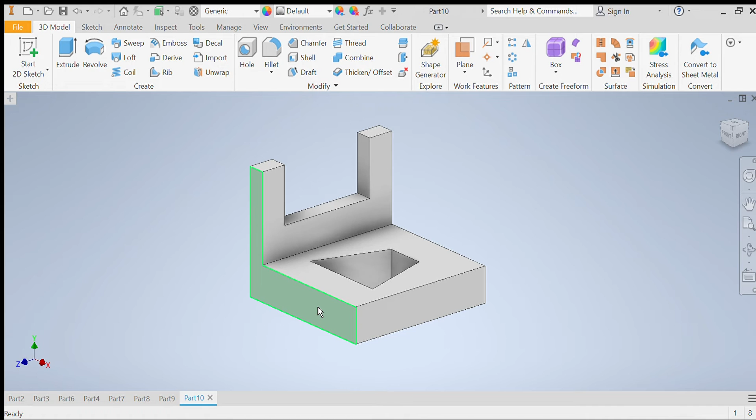So, File, New, Standard Millimeter. Again, if this is going too fast for you, go back to 4.1. I go a bit slower, or you can just ask me in lesson. See how we go. Alright, drawing the simple face, starting from top left corner.

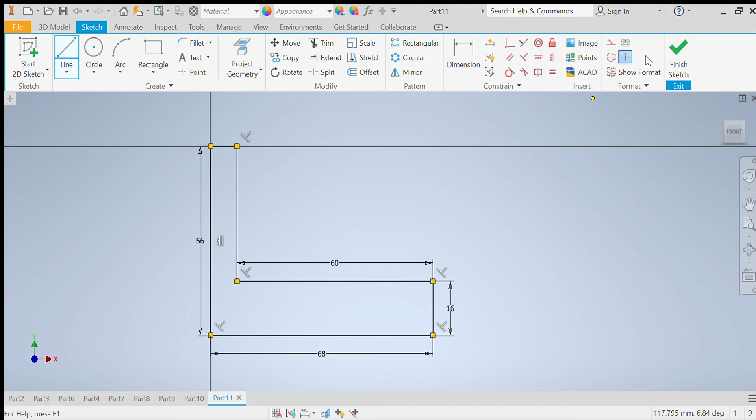And then I just finish off my shape. Click, click, done. Alright, going to extrude that. And I think it comes out 70. Yes. Enter. Beautiful. Alright, this one next.

Going to start a 2D sketch on this face. So, start 2D sketch, hover over here, click. Love Mr. Nelson's way of doing this. I'm just going to draw a rectangle, roughly. Doesn't matter where it finishes up here because we want it to cut all the way through and finish it around about here. To my dimension tool.

Love the dimension tool. We do not know how long this rectangle is across. Could probably figure it out quite easily actually, now that I'm looking at it, but for now, I'm happy with this. So, we want to...

Stop this rectangle from going down too far, so I'm going to get the dimension between here and here, which I know to be 26. My laptop is telling me that it's low on battery. 26. Enter. Next one.

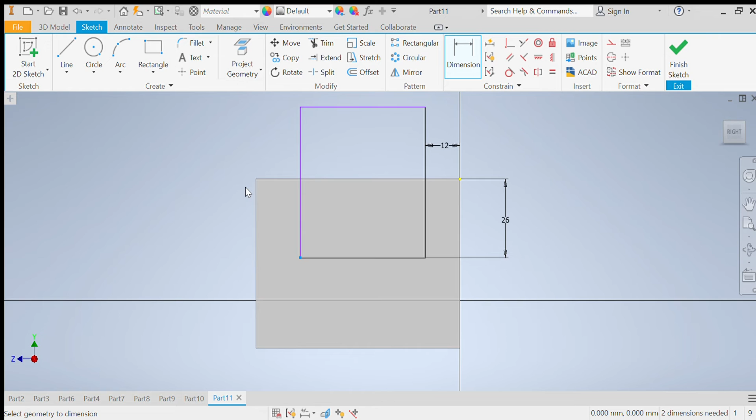Between the start of the rectangle and the end of my piece is 12, not 2, 12, and the same on this side. Now, actually, what I did find, because I'm having trouble with it now, when you're dimensioning, it doesn't actually seem to mind when you click between line and line, as long as you hold it or force the dimension in the right direction.

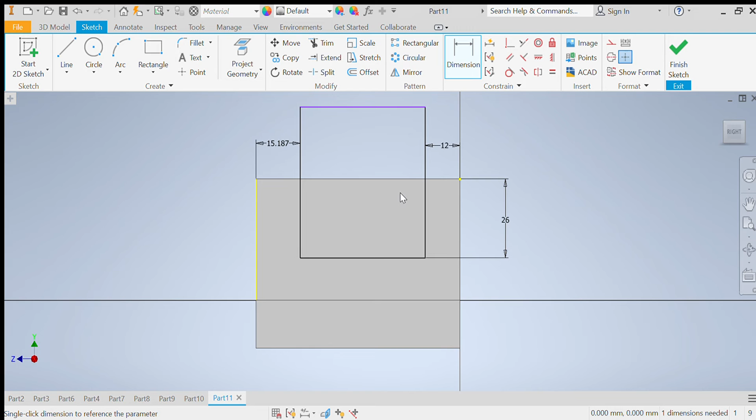So I want the distance between those 2 lines. So I brought it over here, or sometimes it changes the direction or the measurement that it shows you, sorry. Or it shows it over here and you don't know what it means. Whereas when it's here, I know exactly what it means. This one is also 12. That is all I need to do for this one.

Again, extrude, I'm going to hit cut. I know you can't see this menu, but when you do it, it is down the bottom in Boolean, and it's just the one with the red rectangle that says cut. And just hit enter. You don't need to change anything else. Just hit cut. Last one, the most complicated one.

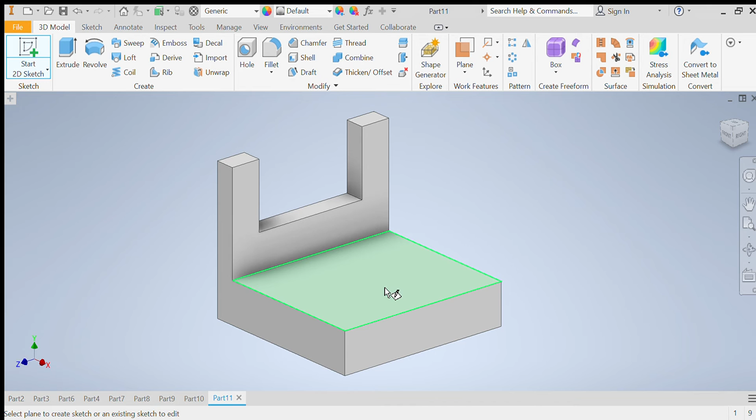Took me a little bit to wrap my head around. Start 2D sketch on this bottom face. I like to rotate it, so up here in this corner, I like to rotate it so that I'm working with a trapezoid on its bottom face, or bottom edge, sorry, side, it's a 2D shape. But if you are fine with working the other way, that's fine with me.

Alright, I'm going to draw a rectangle. Now, again, multiple ways to do this. If you don't like drawing the rectangle and then taking out parts, or just a random rectangle, you prefer more precision, go for gold. I find it takes longer.

Alright, critical measurements that we want to work out. We want to work out where this is sitting on the base here. To do that, we have to set some critical measurements first so that it stays where we want it. For that, we want to set the height.

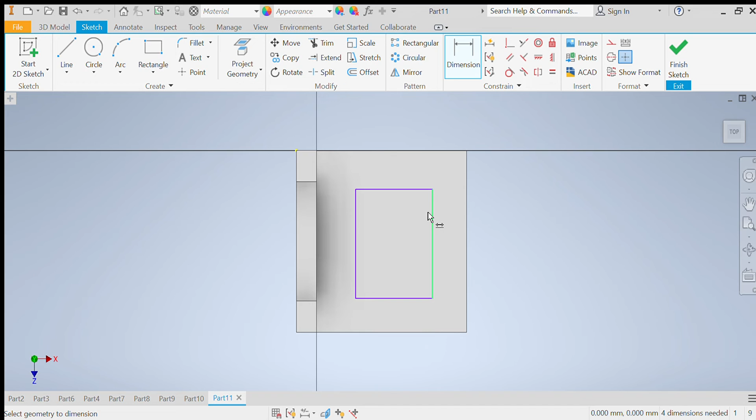Now, when I did it myself, I just clicked this. We don't want to do that because we're going to be deleting this line and it will change some measurements later. So we want to go from top to bottom out here, and it tells us that it is 34 tall. That's okay if it moves up here, no stress.

Next one, let's move it back. The measurement between this midpoint here, if I hover over the line, it should give me a green dot at the midpoint. We want between here and this line here. If I bring it up here, we want that to be 30. So the measurement between the midpoint of our dovetail template and the start of this right side here is 30, from the Inventor modeling exercise document. A bit of a weird one that it's measured to the middle, but it kind of has to because of just what's going on in the middle.

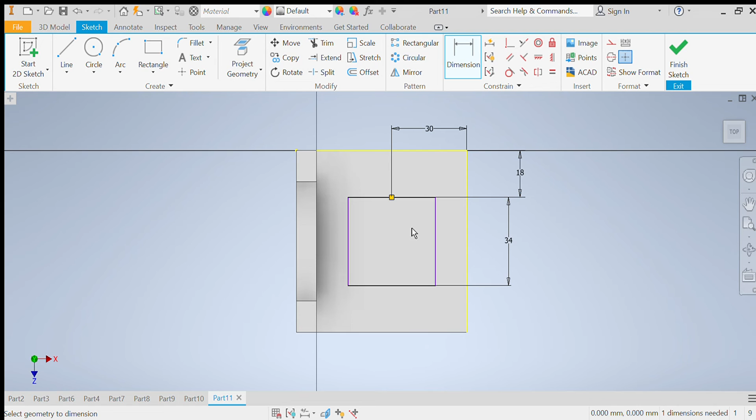Finally, it's sitting a bit too high up, so let's change that. The dimension between here and here is 18. That is the distance between, like, where this rectangle starts. Beautiful. Now it's exactly where we want it. Now we can do what we need to.

There's one more measurement we need to do. This one down here is 20 and 20, which is 40. I'm going to set that so I have everything set out before I do the diagonal lines.

I'm going to draw a line from the midpoint out over the top of a line that I've already done, 9 long. As you can see from the measurements, it comes out 9 across the side, so the top is meant to be 18 long. But they tell you it from the midpoint for a reason, because critical measurements are coming from the midpoint.

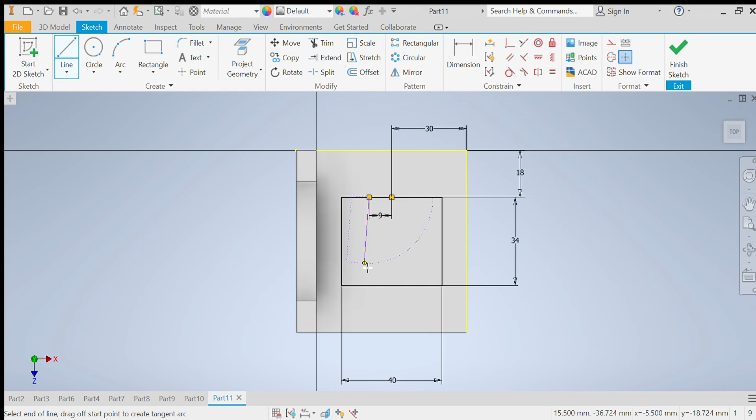Still drawing lines, all I'm going to do is connect the dot down here. When you do that, you'll see that it's a weird measurement of 35.735 millimeters and a very strange angle. That's why they don't give it to you, because it's extremely precise, whereas this, hitting 9 and then just connecting the dots, is not.

Lastly, I'm going to cancel drawing lines because I don't need to anymore. I'm going to delete this line and this line. These two lines up here, however, these little bits hanging off are all one line.

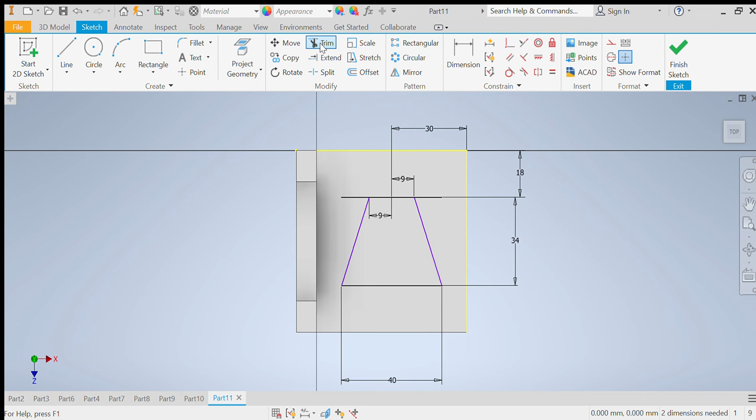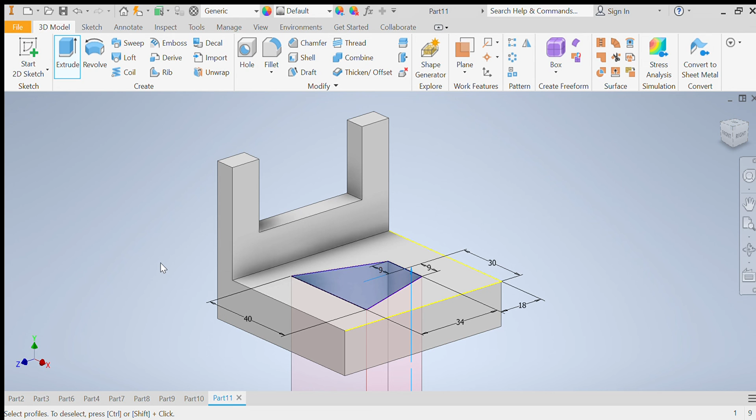So I'm going to use this trim tool up here, and that can trim a line between where it starts and where it intersects with another line. So if I hit trim, that part's gone. If I hit trim, that part's gone. That is everything. Finish. Extrude. That looks weird. Cut. Done. That is the whole shape.

Apologies again if I went too fast or I missed some critical things that you wanted me to slow down on. Ask your teacher in your lesson, or you can slow down the video and watch it again. That is just using the critical measurements that are on the document. If you are comfortable and getting used to using Inventor, this should start to be a bit of a challenge for you, but shouldn't be impossible.

If this is proven to be too difficult, go back and try 4.3, 4.2, 4.1 again. Do them a different way. Try and use some different tools. Try and get faster at them. Try and get used to solving the problems a different way. Even ask, if you're not sure, ask me and I can help you, give you different shapes that you can do. Or ask your teacher, sorry.

For now, those are all of the modeling exercises on the SharePoint document. I hope you follow me the whole way.